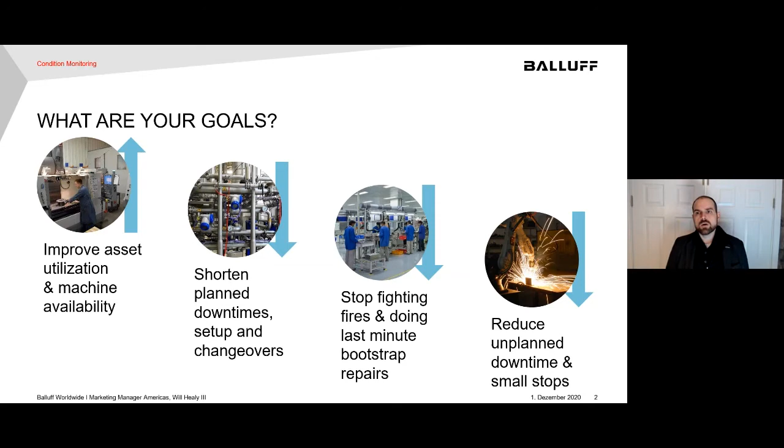So the other thing I want you to think about is on what scale are you trying to do it? Are you responsible for a whole production facility at the plant level? Are you worried about plant health, the overall equipment efficiency, the OEE of the whole plant, the production levels of the plant? What are you looking to try to do?

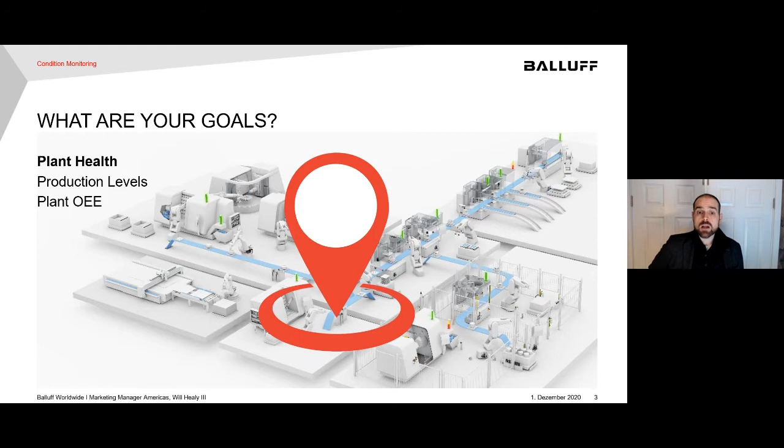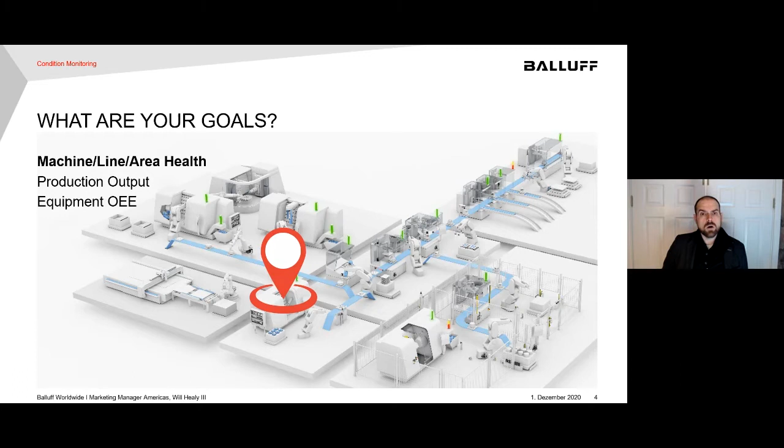Next, maybe you're just responsible for a line or a production area or only one specific machine. Are you worried about the production output of that machine or the OEE of that piece of equipment? So maybe you have a different scale of objectives or goals. Or maybe you're just worried about one piece of equipment that's super annoying and really critical to what you're doing.

And those critical pieces of equipment do typically provide clues before failure. Maybe you have that guy in your shop. He's been there for 50 years. And he can hear something walking down the aisle and know that, oh, that thing needs to get repaired or that needs to get tweaked. That kind of clue is there if you know what to look for and can find it.

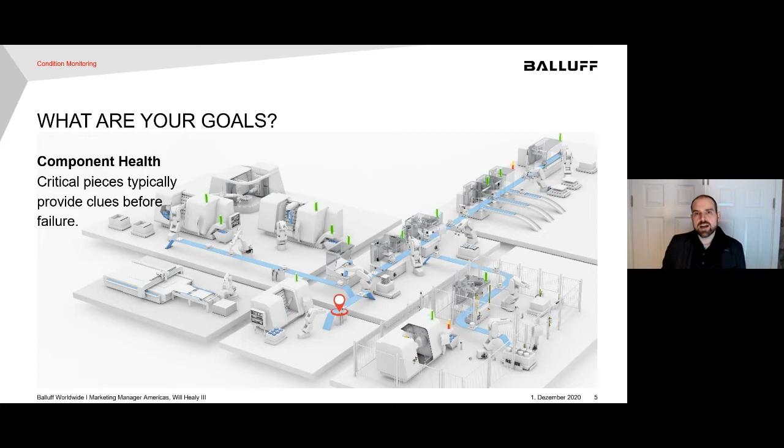So the next thing I really want you to think about is with all those components, ask yourself, if this failed, would we be screwed? And if you think about that, there's probably a lot of components, conveyor motors or conveyor gearboxes, production equipment, or a pump that's pumping cooling water or cooling fluid. There's a lot of components that if they failed, we would be very screwed. So something to really think about.

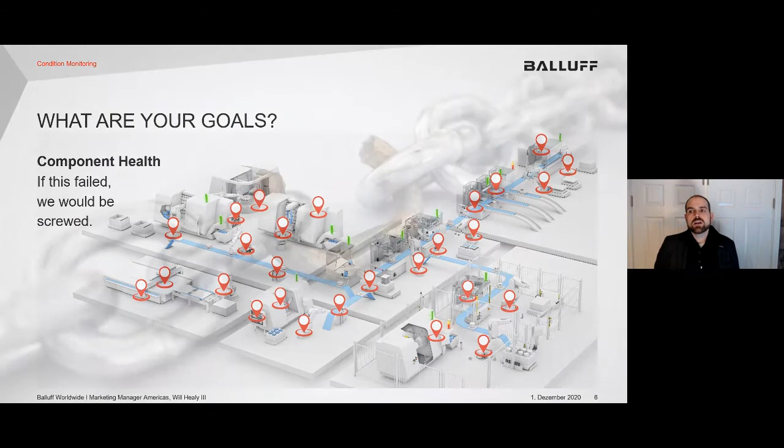And in the end, you have to really think about that you are only as strong as your weakest link. How many components and machines that you've purchased are past their service life? How many of the components in the manual say to replace every 5 years and you've been sitting on it for 10 years? The thing I want you to remember is if you do not schedule maintenance for your machines, they will schedule the maintenance for you. And that's something to really think about when you're looking at your equipment. What are your weakest links and how do we monitor those weakest links so they don't cause catastrophic events in our facilities?

Today, the reason I bring all these things up is all of these topics can be impacted positively by condition monitoring. And this is really great. We have all of this equipment. We don't have to buy brand new fancy machines. It can be done with our existing equipment, because the main problem in manufacturing is modernization is overdue. Automation systems are reaching the end of life, $65 billion of them. How many of us have spec'd a piece of equipment for 7 years and 20 years later, it's still on the production floor, right? We have lots and lots of equipment that's beyond service life.

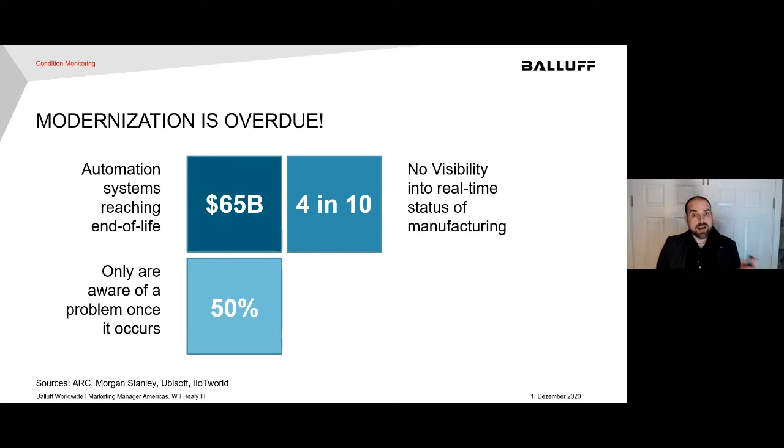4 in 10 manufacturers have no visibility into the real-time status of their manufacturing process. Maybe you have a whiteboard at the end where you write down the pieces after every shift. That's not real-time visibility into the status of your production. And only 50% of people are aware of a problem once it occurs. And that may seem obvious. Well, yeah, I don't know I have a problem until I have a problem. But like I mentioned earlier, you actually can get some hints and some clues that a problem is coming before the problem occurs and becomes a big problem.

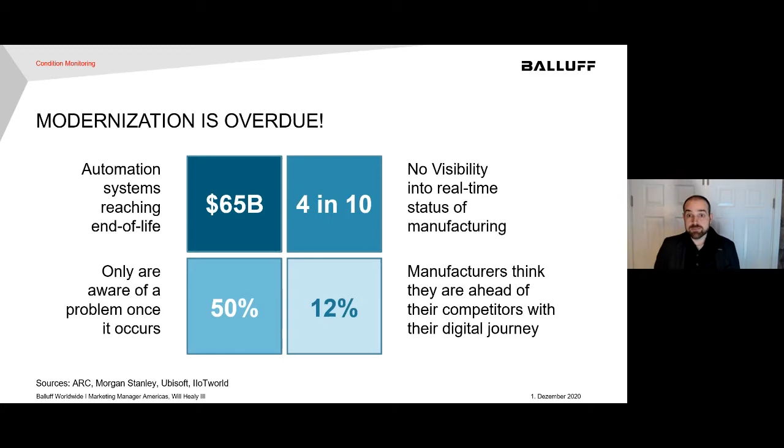But I don't want you to feel upset during this presentation or disappointed with yourselves. Only 12% of manufacturers think they're ahead of their competitors with their digital journey. And so everyone's trying to play catch up and everyone's trying to work on this right now. So you're not alone thinking that everyone else is ahead of me. The real trick is downtime is killing us. And that's really the title of the presentation today: taking control of our downtime.

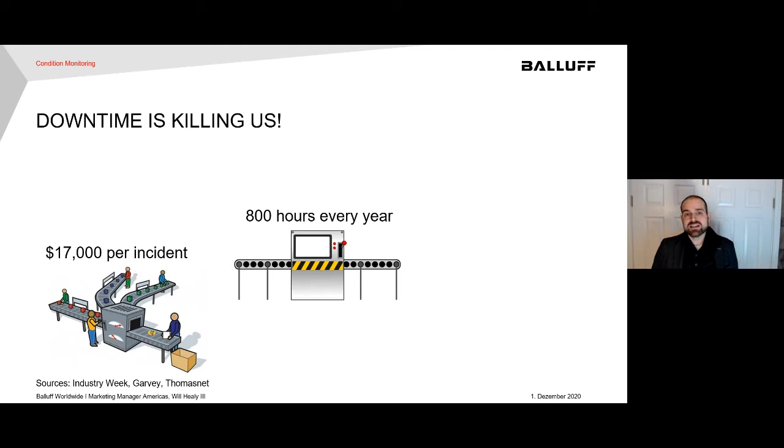Downtime is killing us. Overall, this data from Industry Week: $17,000 per incident on average in their survey. 800 hours every year, according to a survey in an article by Garvey. So 800 hours every year, $17,000 per incident. And in a survey by ThomasNet, $22,000 per minute of downtime in the automotive industry. And at first you might balk at that. That's a crazy number, Will. But think about it this way.

In Kentucky at Toyota TMMK, they make a Toyota Camry every 50 seconds. So every 50 seconds, a Toyota Camry comes off the end of the line. How much does a Toyota Camry cost? $30,000 starting. So $22,000 per minute actually isn't that surprising in the automotive industry when you think about it. And I know there's other industries like the oil and gas market where the downtime can be even higher.

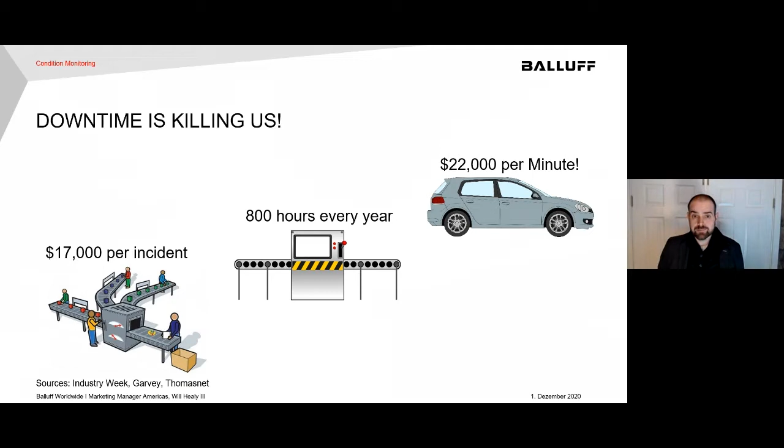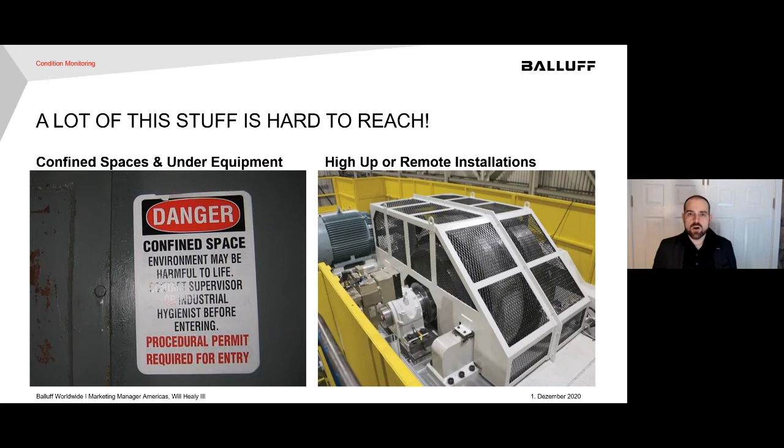We have things that are high up out of reach. We have things that are in confined spaces, and we have stuff that's underneath equipment that's hard to get to. So a lot of this is hard to get to. So how do we monitor it easier and without having to enter those places or get to those places and all the safety requirements that go along with it?

The thing I really want to point out, and the reason we're talking about condition monitoring, is we can detect failure before catastrophe. And that's really important to note. And I totally stole this chart from an article in ThomasNet, 4 practices for catching early signs of machine deterioration, but I thought it was such an interesting, good one to share with you. What we really want is more time to react and prevent functional failure, and we can do that with condition monitoring. So, when the deterioration starts on an asset, it can be a little bit hard to detect any issue. But there's a point P in this chart where we have potential to detect the failure.

And as things go along, maybe by monitoring lubricant or monitoring vibration or monitoring pressure, we get into infrared thermography, humidity, noise, heat, smoke. If something's smoking, we're very close to failure occurring, right? If you see smoke or you have something that's hot, probably you're very close to failure. And so that interval from P to F, the P-F interval, we want to be able to detect and get the longest P-F interval we can, so we have the most time to react and prevent the functional failure with condition monitoring. I thought that was a really interesting article.

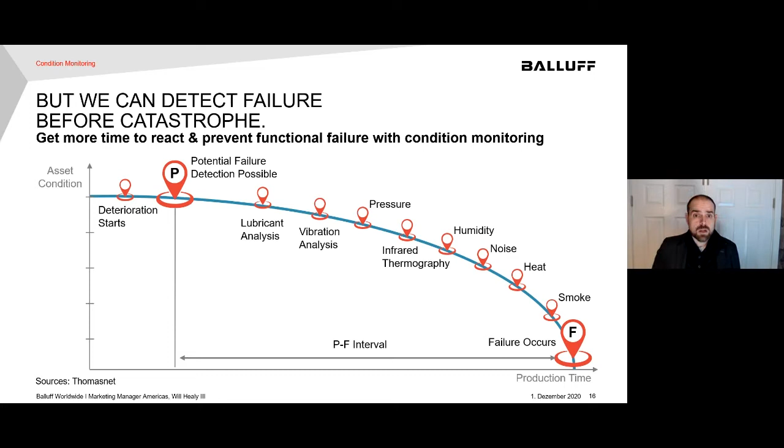So your competitors are investing in this. So if you think, oh yeah, these are interesting topics, Will, but whatever. No, competitors are investing in this technology. Your competitors, other manufacturers. From a survey from Control Engineering, the average IIoT budget is $328,000. And the main thing that we're spending money on is sensors. And the sensor budgets are growing about 15% a year, while network budgets are growing about 19% a year. So we're putting more sensors on machines and we're building more connectivity into our plants.

And if you are not doing that, that's something to take very seriously. That $328,000 is average. 1/5 of those people have more than $500,000 for their budget, and they're buying these kinds of technologies to do this. Okay, so condition monitoring. Now what?

There are some things to consider before I jump in here. There's lots of things that you have to think about. You have to really sit down and plan out what you're thinking about. Am I monitoring, as we talked earlier, the plant versus the machine versus devices? Do you have periodic versus continuous monitoring? Predictive maintenance versus preventative maintenance? And then how do you connect it into your equipment? So that's what we're going to talk about next.

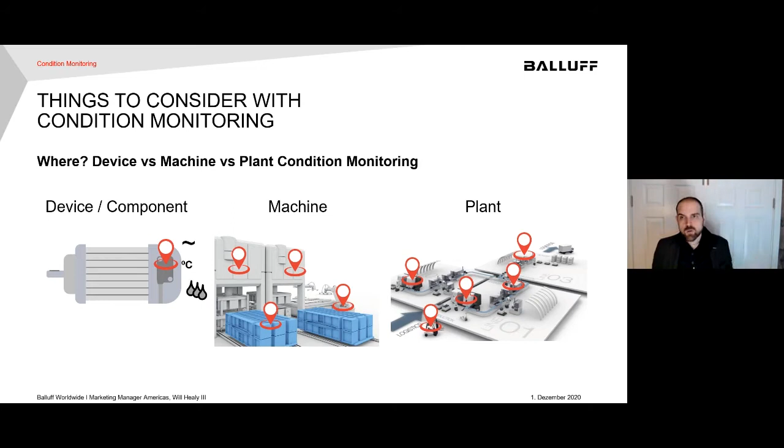That's periodic monitoring, but you just get a snapshot in time, right? So they might be doing periodic monitoring on the weekend when the equipment's not running or it's not running at full production, or you really have to be monitoring in real time to really get a clear view on your whole production process.

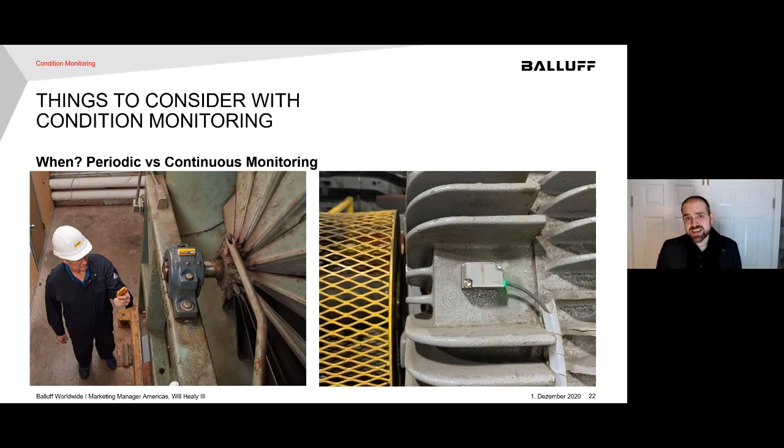The next thing to consider with condition monitoring is, right now you're probably doing preventative maintenance. Every so many hours, lube this, or every so many hours tighten this. Those preventative maintenance applications are based on timing and the age and the use of the equipment. And the problem with preventative maintenance is preventative maintenance has an 82% random failure pattern.

And so that can really be an issue for us, because you'll go and do a preventative maintenance and then literally the next day it'll break down. You think, I just did the preventative maintenance, right? So that can be a real challenge for us.

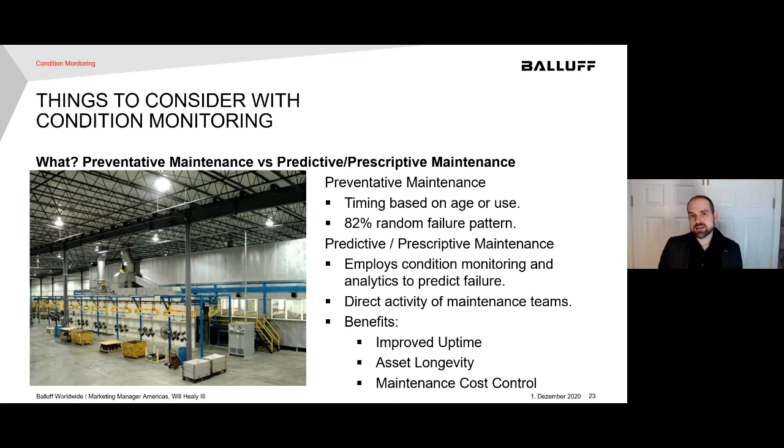So with predictive maintenance, the idea is we're going to use data, we're going to analyze this, and then we're going to employ condition monitoring and analytics to predict failures. So we can improve uptime, we can improve asset longevity, we can get maintenance costs under control. And then we can really direct the specific activities of the maintenance teams and even prescribe what they need to do to have the most impact at the time.

So the other thing that we have to consider with condition monitoring is connectivity. How do you want to connect to it? Is it distance really far away? Do you need a wired or a fiber Ethernet connection? Maybe wireless Ethernet or cellular.

Proximity, how close, if it's close to you, maybe a near field might work if you're just doing some detection. Maybe near field with a sensor and a cell phone will work, or Bluetooth with a cell phone and a sensor will work. USB to a device or a computer that's on the machine, or even serial. I've seen some serial devices. But are you doing periodic versus continuous monitoring? That's going to have a direct impact on the kind of connectivity considerations that you need to consider.

What I'm going to talk about today is a connectivity technology called IO-Link. It's a universal, smart, easy, and IoT-ready technology. It was designed and originally conceptualized as USB for automation. So the idea was to be easy to use, easy to connect, easy to plug together.

And I know everyone says easy, but think about USB. The first time you went from using a parallel printer to a USB printer, it was way better, right? So much easier. And so that was the idea, and the concept here was to make it easy to get smart devices onto equipment. And what's cool about this is there are 200 plus vendors manufacturing IO-Link devices and thousands of products, probably tens of thousands of products at this time. So there's a lot of opportunity for you to have devices and connectivity for this.

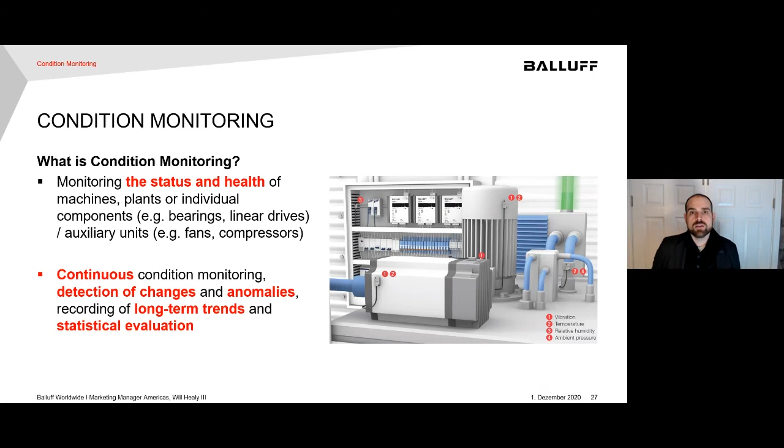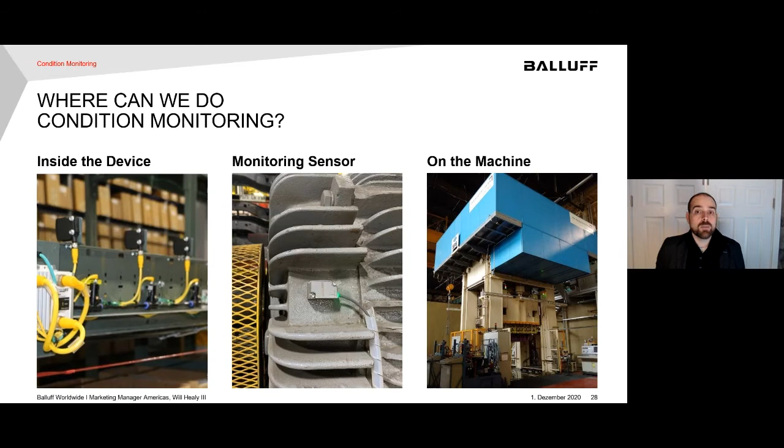So again, I'm gonna talk about where we can do condition monitoring. We can do it inside a device. So we can do condition monitoring of a device itself, like a sensor. We can have monitoring sensors that monitor bigger devices like motors and compressors and fans. And then on the machine, we can mount a monitoring sensor to actually allow us to do that more. So the monitoring sensor can be used on components or on machines, but we can also monitor inside the device. So condition monitoring is available in a lot of IO-Link devices, like IO-Link power supplies or the photoelectric sensor you see down here.

We can get information and condition of the environment and of the device, like the internal temperature or the signal intensity of the photoelectric light, the frequency of the switching, the operating hours, how many hours have we run, the lifetime remaining of the device. We can do calculations and tell you how much life is left in the power supply. The stress level: the two things that stress out electronics are heat and load. So is the stress level of the device high? And that's going to shorten the lifetime of the device. So we could tell you that.

Light remissivity, signal stability, sensor LED power. The LED dies a little bit over time. So what's the strength of the sensor LED? If you have a short circuit, or what's the current draw of the power supply? There's lots of different things we can do inside a device. So those are the types of devices that we can utilize.

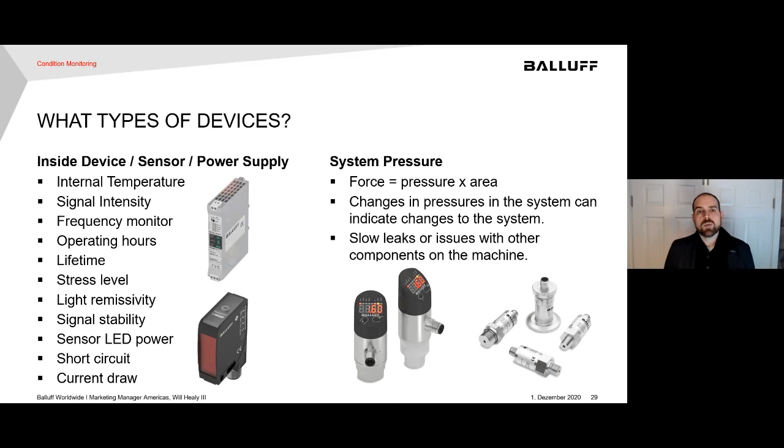And then also there's the option to monitor system pressure. System pressure is an interesting topic because force is equal to pressure times area. So if we have changes in pressure, that can indicate that there are changes in your system, maybe more friction requiring more force for the movements that you're doing, maybe some slow leaks or issues with other components on the machine. So system pressure can be an interesting thing to monitor and to trend as continuous data to be able to get some insights. But while we have the ability to look inside devices like sensors and power supplies, and we have the ability to monitor system pressure, what I'm going to focus on today is the condition monitoring sensor.

So with this brand new technology from Balluff, we can monitor multiple different measurement values with one sensor housing. This is vibration in 3 axes, temperature, ambient pressure, humidity. We're going to go in more detail in a second. It can do lots of data pre-processing with onboard calculations of statistical parameters. It can give you events and statuses, so like warnings and automated monitoring. You can set thresholds inside the sensor and then send outputs. And then you have the ability to change the process data that's most interesting to you. So there's lots and lots of data inside there, but having it present 5 different measured or calculated values back to the controller. And all this data comes over as process data to the controller, which is really powerful because that allows you to take it right in the controller, put it on an HMI very easily.

Compact design, it's a very small form factor. It looks like a little flat pack Prox if you've seen that housing. So really small. It has a stainless steel housing, so if you're in the food and beverage market or you have wash down in a metalworking machine or cutting fluids in there, we have IP67 or IP69K depending upon the housing that you're looking for. And then there's an IO-Link interface. So I talked about IO-Link being universal and easy to integrate. It really creates convenient integration into a wide range of technologies: EtherNet/IP, Profinet, Profibus, DeviceNet, CC-Link, EtherCAT, Siemens PLCs, Allen Bradley PLCs, robotic end effectors, robot controllers.

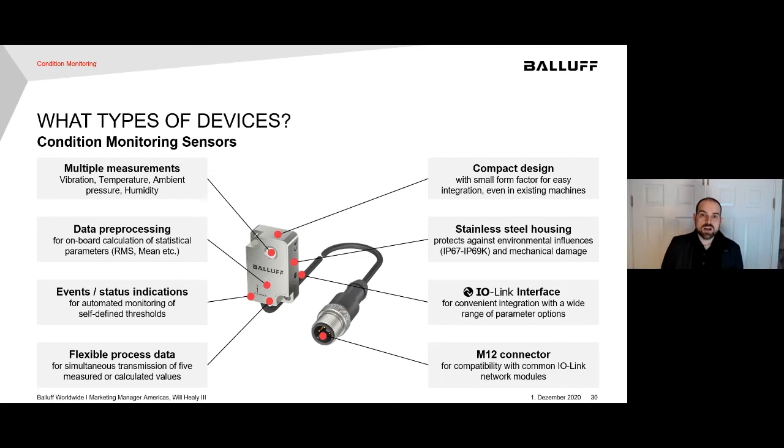There's all kinds of things that we can integrate into because of the IO-Link interface. And then it has a standard M12 connector that most automation devices want. So when we look at the vibration module, I am by no means a vibration expert, but here's some basic things that can be done with it. We can do vibration velocity or vibration acceleration, or get just the basic frequency.

The key thing here is the sensor's designed to detect changes and anomalies, not necessarily to interpret the absolute measured value. So that's something to really understand. We're not an instrument here. This is a sensor to give some vibration information, but this has been very effective for many people monitoring vibration on this scale. And there's lots of calculations that can be done.

You can see them there, and different severity zones, pre-alarms and main alarms, RMS values, and all kinds of things that can be done. So really interesting what you can do with vibration, and that's the main reason people are using it right now. You can also do temperature measurement of the surface, so the back of the sensor, whatever it's mounted to, gives you a measuring range of the temperature.

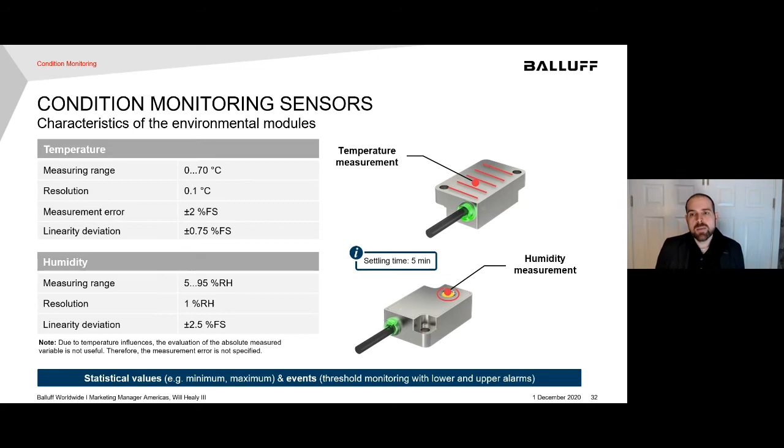And then one of the part numbers has a diaphragm here on the face of the sensor. It allows you to do humidity measurement as well as ambient pressure measurement. And so the ability to set events based upon humidity and ambient pressure can help in certain situations. And we'll talk about some applications for that in a few minutes in our case studies.

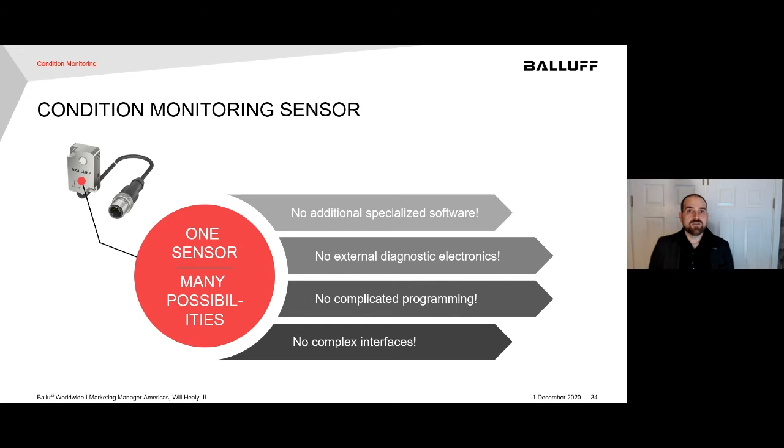So overall, this one sensor has many possibilities to do different condition monitoring applications, and it doesn't require any sort of additional specialized software or monthly subscription fees if you don't want them. No external diagnostic electronics, no complicated programming. The data comes as process data right into your PLC like any other sensor, and no complex interface because we're using IO-Link. So if you are interested in software capabilities, I've mentioned multiple times, the condition monitoring data is simple to integrate into most industrial PLCs and robot controllers. So it's very simple data that you can integrate.

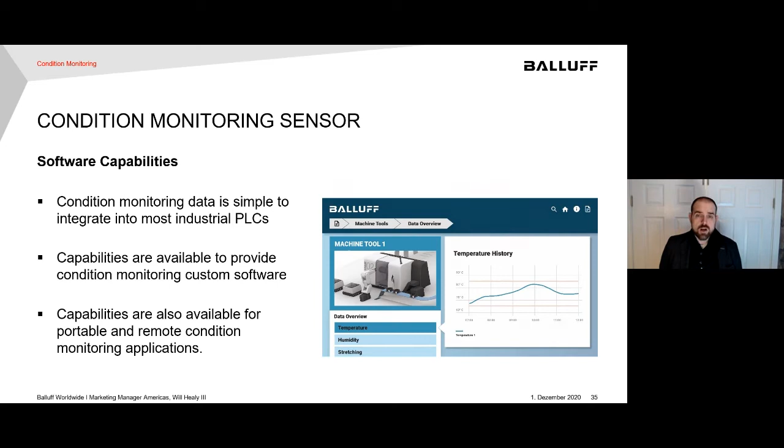So where are places that people can use a condition monitoring sensor? There's so many places for potential failure in a plant. I'm sure you know them all intimately, probably on weekends and 3 o'clock in the morning. But worn bearings, worn belts, frictional rubbing, happens in a lot of places, unbalanced or soft foot, particle accumulation like on a fan blade or inside a device, inside a pump.

Displacement, misalignment or collision with the device, and then any place where you have a remote room or a remote building where no one's watching it and no one's looking at it and no one's monitoring it. And then inside electrical cabinets, we have a really cool case study coming up here in a minute with electrical cabinets. But the goal is, where are you having machine downtime, and how could we monitor mechanical components? How can we monitor machines and the factory to increase the plant productivity? So do you have a spindle or a bearing or a pump or a gearbox or a fan or a switch cabinet where that is failing and that's causing headaches, and we need to look at that.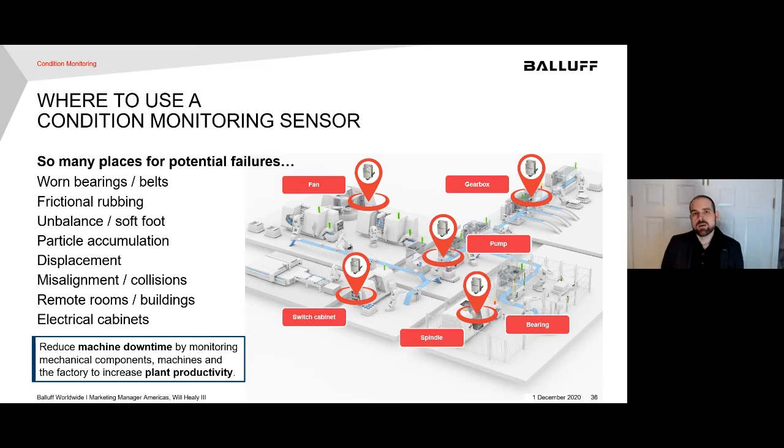So who's actually doing this? I promised you 10 case studies, maybe 11. Somebody keep counting, let me know how many it was. But here's some case studies.

So the first is the chain conveyor drives. This customer has thousands of feet of chain conveyor with multiple synchronized drives. When one of the drives gets out of sync, the chain buckles, crashes, and causes major production downtime for them. So they are able to use the condition monitoring sensor to alert the maintenance with excessive vibration in the gearbox. And then they can perform a controlled shutdown and prevent a major crash.

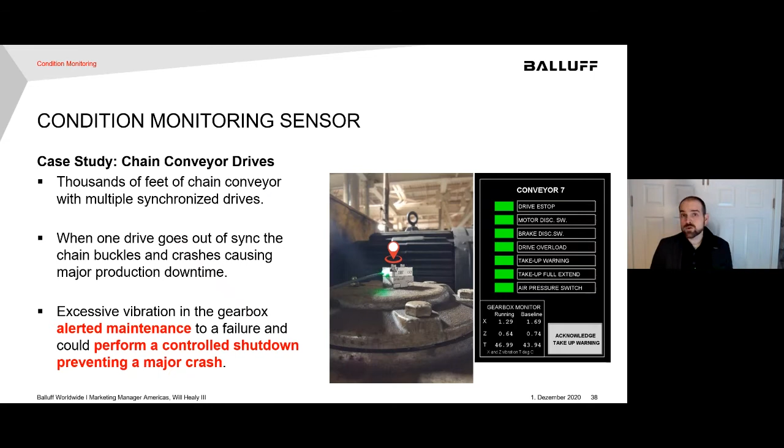And this crash can cause days of downtime in this customer. So this is something that they take very seriously, and the ability to alert ahead of time and perform a controlled shutdown is really a big deal for them.

Here, anytime you have an unstaffed or decentralized pump house, right? Maybe you're pumping water from a well over to a building. You know, pumps are supplying lubricant, oil, water, other materials into the production process, you know, foodstuffs.

So pumps can be everywhere and possibly in rooms or buildings that go unstaffed for days. So manual monitoring, which is what a lot of people do with these pumps, you know, someone's got to go out and manually do it. They got to document it. This can be time consuming and unpopular and questionably reliable.

Did they do it on a continuous basis? Did we do it in a way that the data is reliable and usable to us? So continuous condition monitoring gives us that reliable and easy data to analyze when we need to analyze it in those remote and unstaffed or decentralized pumps.

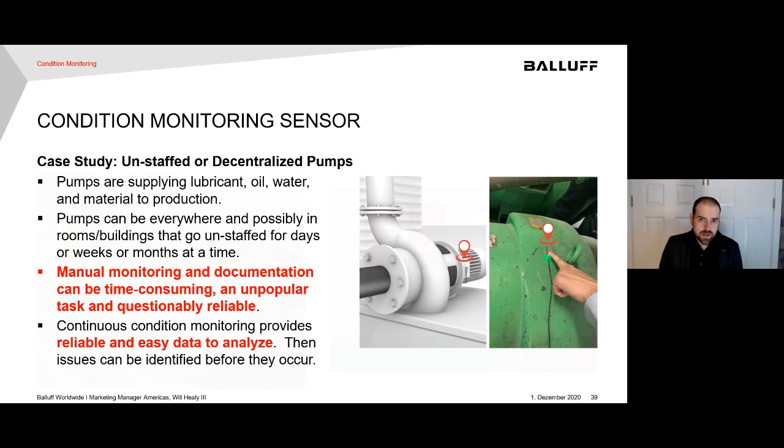Here's an overhead crane. You know, you think about anytime you got an overhead crane that's way up in the sky, you don't want someone to climb up there and have to look at it or see what's going on. So if you can do condition monitoring up there, we can get data about what's going on with the equipment without anyone having to climb up there or get in a bucket and lift them up there. We can get the condition of those devices without anyone having to physically go into the overhead crane.

And so this is nice because we've got controls up there. We have ways to connect this, and then we can measure the vibration and the temperature of the motors and the components on the overhead crane.

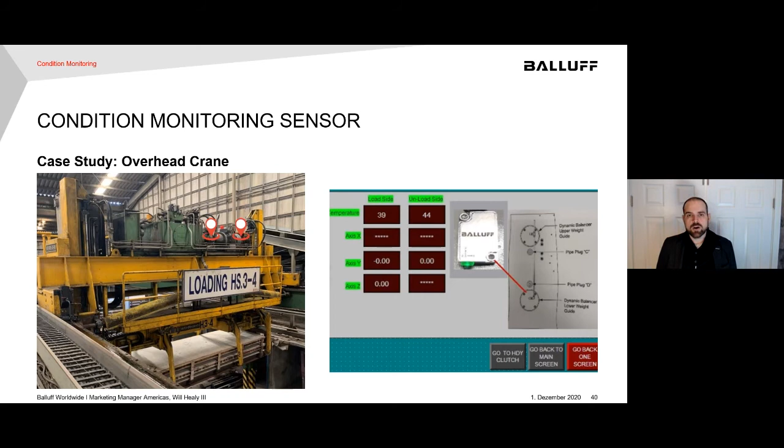This is a candy factory. They wanted to implement a plant-wide monitoring program. So they had a corporate initiative to implement a plant-wide monitoring. They wanted to monitor dozens of locations and components on each candy molding line, temperature, humidity, vibration. And so by implementing a plant-wide system and monitoring multiple locations on the line, they now have a map of conditions of devices across the whole plant. And this has provided them with insights and helped them improve the OEE of the entire production plant.

So this is a really powerful condition monitoring story with the ability to monitor all the different components and drives and conveyors and gearboxes across the plant to get a clear view of the condition of all the devices across the plant.

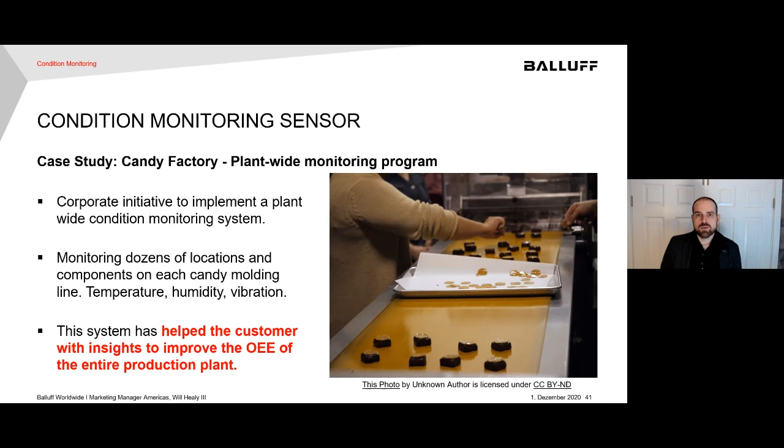Here, this is a hydraulic stamping press, you know, maybe used for hot forming or hydroforming presses. So they're monitoring the temperature and vibration of the pumps and looking to see what's going on there. So they're monitoring the surface temperature of the pump and the vibration of the large hydraulic pumps. You see that thing, it's huge there. And they've got two different sensors on it in the left picture, and you can see it there in the power unit, and then it's running the press there.

And so they can get the data without having to go down in the pit to look at that hydraulic pump and to do any condition monitoring. They get the data right in the PLC, in the controller of the press. And so by using continuous condition monitoring of the surface temperature and the vibration, this has really given them a lot of value in their production process.

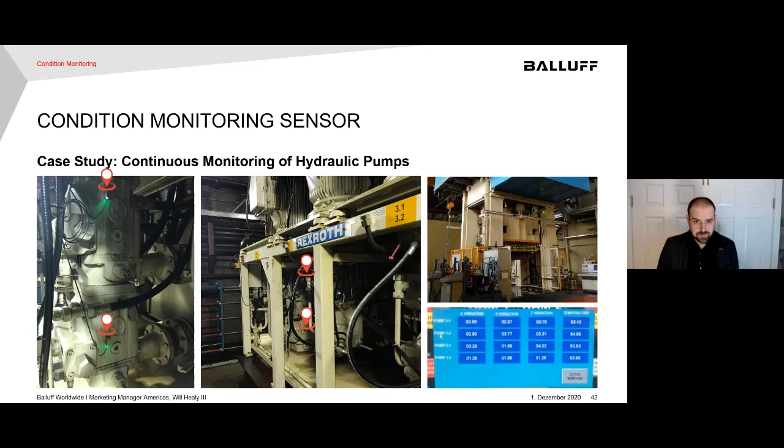Keeping on stamping presses. This is looking at press health. You know, they were having trouble where the press was getting damaged by the design of the dies that were being loaded into the press. And so the tooling created excess shock from the snap through on some of the dies in the tooling that were loaded in the press and causing damage on the press.

So by monitoring the peak and average vibration values during the run, they were able to figure out which were the hardest hitting tooling, comparing the tooling loaded to the shocks and the vibrations that they're getting. And then the die engineers were able to make modifications to the die sets and lessen the shock of the impact and reduce the press damage, which is really a compelling story if you think about it.

That's really amazing. So you can see they're monitoring there on the top of the press, above one of the pillars, to look at the vibration and the condition of the press itself during the production process.

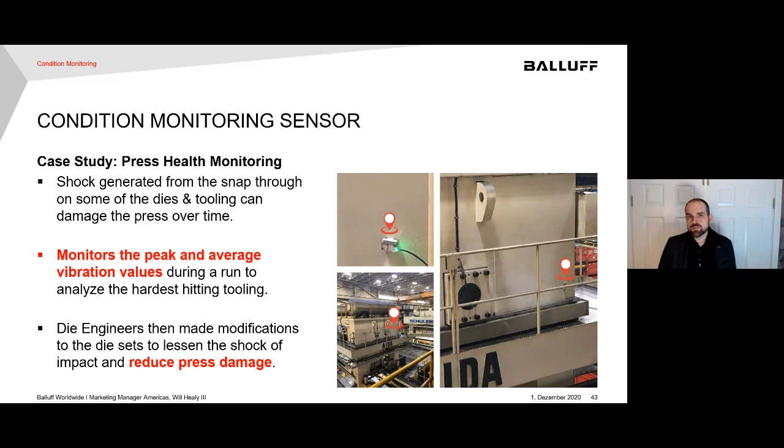This is an example. I don't have a picture of this one, but it is a customer story. They're monitoring, you know, ambient temperature, humidity, machine temperature, since it can influence the product quality in the process. So by trending and monitoring the machine, they were able to increase their process reliability and reduce the production rejects. And so by monitoring that extrusion machine in a plastic injection molding environment, they were actually able to improve their process reliability.

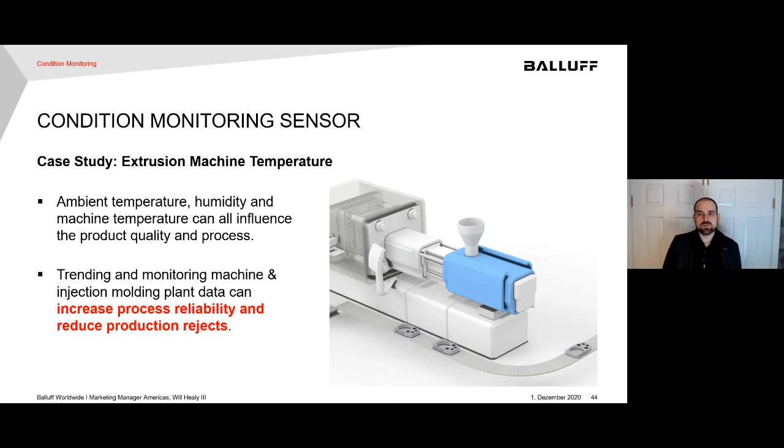Here, this is a conveyor. It's a glass handling conveyor, and they were monitoring vibration velocity, the RMS for the X, Y, and Z axis, and the temperature. And the data goes, they don't actually run it into the controller. They're using Node-RED and a web service to actually run it straight into a server and to do analysis and reporting using Grafana. And so you see their reports here and their ability to trend the conveyor motors.

They've got a condition monitoring sensor on both sides of the motor and monitoring the glass handling conveyors in the production plant. So this allows them to really monitor and know what's going on with the equipment and to create alarms if there's any overloading of the conveyor belts.

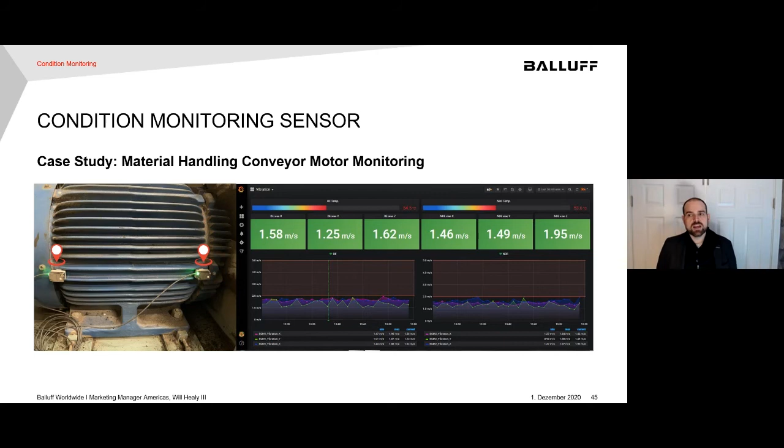And next is an automated assembly line. Anytime you have a highly automated assembly line, especially in tier 1 manufacturing for automotive, there's lots of linear ball screws and rotary bearings and those kinds of things, and they're subject to mechanical wear and contaminants. And these things can fail absolutely without warning. So replacement and repair of these can lead to long downtimes and cause issues with trying to get to them inside of a piece of highly automated equipment.

So condition monitoring provided advanced warning for this customer and allowed them to schedule the maintenance during breaks and planned downtime. So it's been much more reliable for them because they've been able to monitor the bearing on the left side, the bearing on the right side, and the ball screw drive, and to get the condition data, the vibration data, the temperature data, and then create an advanced warning system so that they can do maintenance on their time and schedule it when they want to get it done.

And then my second to last case study is a controls cabinet monitoring. Moisture, humidity, high temperatures inside of an electrical cabinet can really kill and destroy sensitive components and terminations. So if we monitor the humidity, the pressure, and the temperature inside the cabinet over time, we can determine exposure rates.

Especially in the food and beverage market, if you've got a washdown situation, we could detect if a cabinet's left open, right? If the humidity level spikes, or if the cabinet's been sprayed inside during a washdown process, there's probably a pressure and humidity peak inside the cabinet, and even possibly a temperature peak. So by using a condition monitoring sensor, we can get an idea of what's happened inside the cabinet, especially in an environment with a lot of fluids and material like a washdown environment in food and beverage.

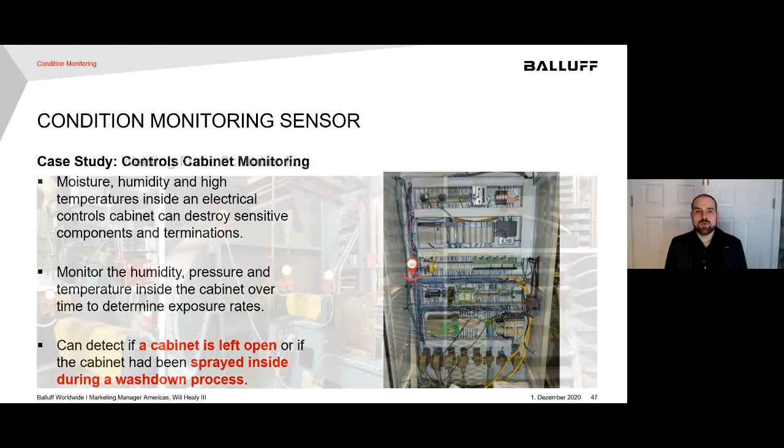And then my last application case study for you is a condition monitoring sensor used on a welding fume scrubber fan. So anybody who's doing welding, you probably have one of these welding fume scrubbers, right? It's pulling all the fumes out of the production area and scrubbing that and then sending it out through an exhaust. Well, in these, we can have buildup on the blades of the fan. And when the particles in the smoke build up on the scrubber fan blades, this can cause excessive vibration and potential failure.

In this specific customer, the loss of operation can cause 16 hours of downtime and require specialty hazmat maintenance personnel. And so it can be a very costly and very time-consuming repair when the welding fume scrubber fan goes down. And so you can see they added condition monitoring to this piece of equipment where they're monitoring the fan, the drive shaft and the gearbox, and the motor itself.

So these are all pieces that they're monitoring, looking at the temperature, looking at the vibration, and really understanding if the bearing's overheating, or if the motor's overheating, or if the fan blades have excessive vibration. It probably means there's buildup on the blades. Let's do some scheduled maintenance and get that fixed. Really powerful opportunity for them to really improve their production and to reduce the downtime.

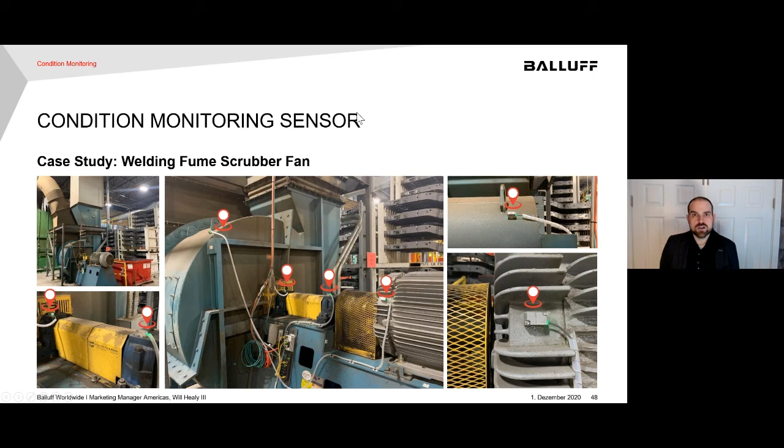Okay, so you want to get started with condition monitoring. That's something you're interested in. I found this really great article about what are the 4 condition monitoring steps, and I went round and round whether to use this or not, but to be honest, it's a really good plan. So I'm just going to share it with you. It's from an article in Control Engineering called Choose the Right Industrial Wireless Technologies for Condition Monitoring, but it doesn't even have to be wireless. They presented 4 condition monitoring steps, and I thought these were very powerful.

So conduct a criticality analysis. So really what they're asking is, what assets have the most impact on the bottom line? And then identify the probable failures the asset will experience. So how has that asset failed in the past? What has happened to similar equipment or in your past work experiences with similar equipment?

Third, decide on technology that's best suited to detect each failure mode. Can you just monitor the machine, or do you need to monitor the device? Does it need to be periodic, or would continuous be better? Can we get by with preventative on this, or do we want to get predictive on that? And then how are we going to connect it once we decide on the technology?

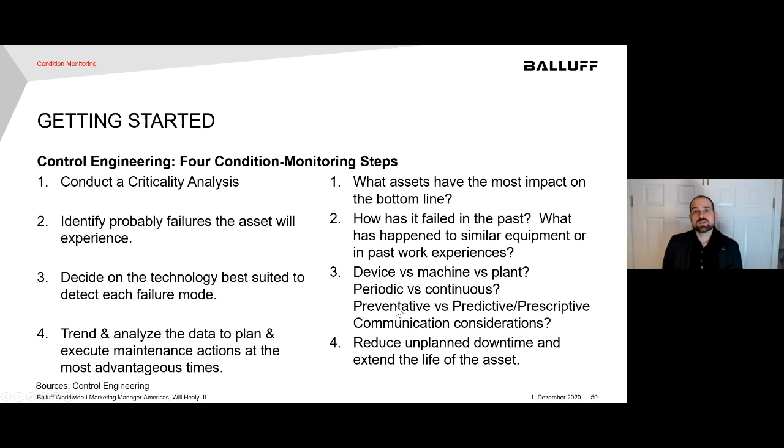And then last but not least, trend and analyze the data to plan and execute maintenance actions at the most advantageous times. What that means is look at all the data and use the data to tell us what's the best thing to do. By doing that, we can reduce the unplanned downtime and extend the life of the asset, which is really what we're trying to do, right?

So how do you get started? I work with a lot of companies doing IoT projects, smart manufacturing projects, and condition monitoring projects like this. And the most successful organizations almost always follow a plan similar to this. They define their vision. What are they trying to do? What is their end goal? They set some objectives for the year. And then inside that year, they identify a few projects and tactics that they're going to try to implement.

They make sure that they identify a couple of measurements, KPIs, key performance indicators, things that are going to tell them whether it was successful or not, so that they can document the success and feed that back in as a loop and say, see, this worked, give us more money so we can do more of it, right? So if we have those KPIs identified, which a lot of people forget to do, then it's much easier to ask for more money when we find that we're successful with this.

And then last but not least, assign someone responsible. I always say if it's not someone's job, it's no one's job. Or if it's everyone's job, it's no one's job. So it's got to be somebody's job to work on these projects.

What we've also found is when making changes to a maintenance program, it really is best to start with a small pilot. Grow it over time. Don't try to change your entire production plant at once. So start with a small pilot, create buy-in with the maintenance teams and the leadership team. It should be a joint project between the maintenance teams and the leadership teams. People should be working on both teams towards this project.

Condition monitoring provides warnings about faults and makes it possible to schedule repairs, all without unplanned downtime and lost production. And so really, by getting those warnings, we can schedule repairs, we can eliminate unplanned downtime. So condition monitoring really does help reduce downtime. You saw lots of different ways that can work in different production facilities, and it will guarantee you hit your 2021 goals. That's the guarantee that condition monitoring will help you if you implement it.

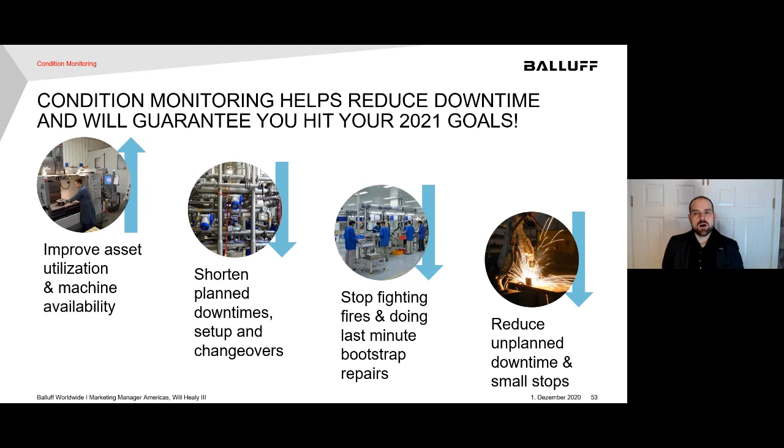So what are you trying to do again? Are you improving asset utilization and machine availability? Are you shortening planned downtimes, setup and changeovers? Are you trying to stop fighting fires? Condition monitoring absolutely helps with that and with doing those last minute bootstrap repairs. And then, we want to reduce unplanned downtime, the small stops, and condition monitoring absolutely can help that and improve asset utilization and machine availability.

So what next? What do you want to do? Ask yourself right now, do you want to learn more about condition monitoring? Is that something you want to do? Maybe you want to discuss how to implement your first pilot. Maybe that's interesting to you. You're convinced you want to do a pilot, or are you just interested in more best practices for reducing downtime? Maybe you aren't at condition monitoring yet.

We've got a lot of great ways to talk about reducing downtime, not necessarily condition monitoring, ways to do it in welding and stamping and metalworking and assembly automation applications and manual assembly applications and food and beverage and in packaging and life science, all these different markets. We've got great best practices that we can share with you for reducing downtime.